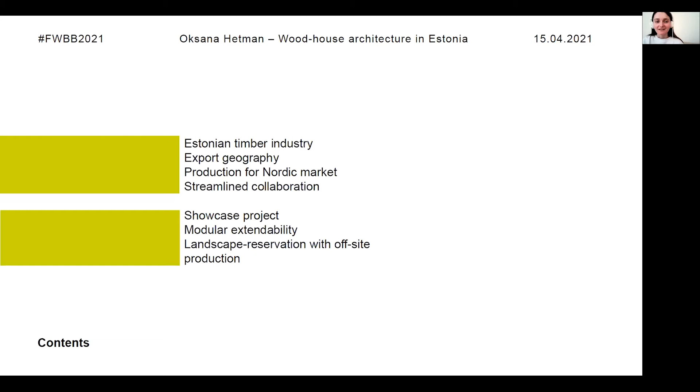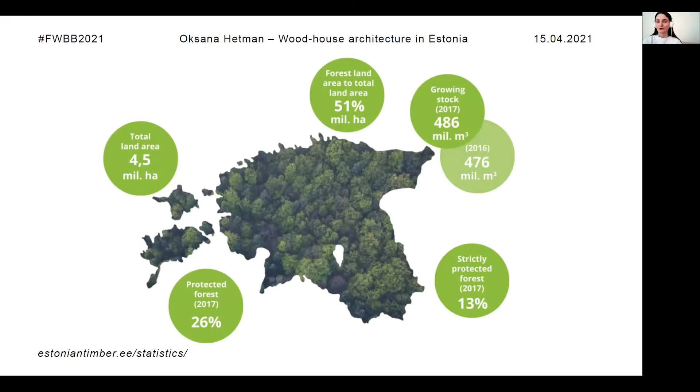Well, Estonia is a land of woods and forests, as it's similar for all the Baltic countries, I guess. But here are some numbers about the official forest land territories and types of forests, and naturally, with all these natural resources, timber product industries are developing and are really popular and successful in recent years. Now, from all the possible products which are made from timber, wooden buildings, as we can see from statistics, are taking the first place in exports.

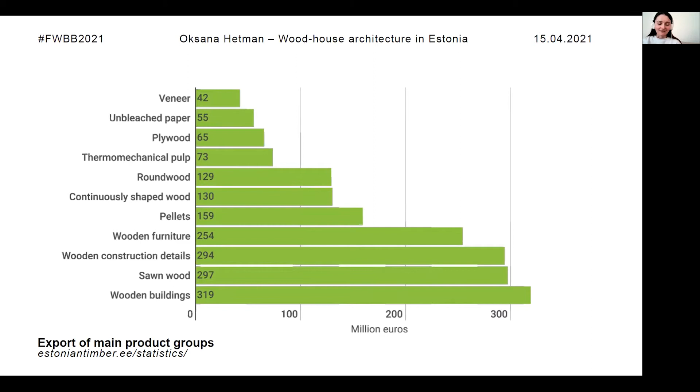And obviously it's because of the location and the convenient transport paths, because as with any other products, but especially with wooden houses, it's important to be able to transport bigger shipments to a destination country. So as the main percentage of the products go to Sweden, Finland, and Norway, I'm working in an architectural company, and we as architects are focusing on those markets too, because since most of our Estonian wooden architecture goes for export, we have to be oriented on outer markets too.

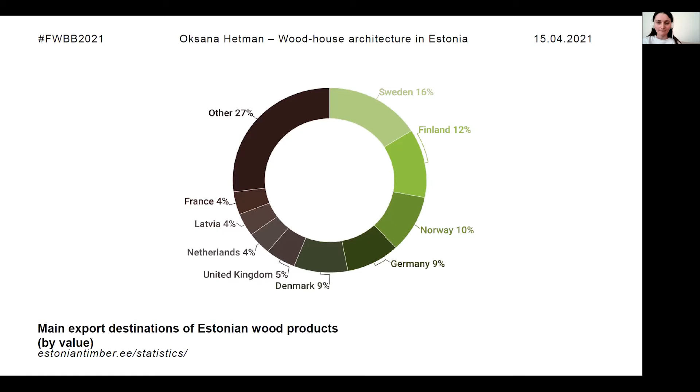Then why Scandinavia, or what are the Scandinavian markets looking for in our wooden buildings or products? First of all, it's quality certified materials, and that would be valid for most of Europe, but then a controlled production process, because obviously these production facilities and companies are available outside of Europe and in more eastern countries, but these Baltic countries can show a really controlled production process, and it's really possible to visit all the factories, and there is high-tech equipment available at the production sites.

The next one would be the already mentioned transportation routes, because direct shipments are possible by ferries, and it's really convenient, which was also used for our project, which I'll be showcasing later. Then one more important thing is the skilled specialists and affordable rates. So why our architectural company is very competitive to the local Scandinavian companies is we have a really big talent pool, and Estonia offers really favorable economic conditions in terms of taxes and general laws for managing companies from Estonia. Also, all the digitalization saves money and time.

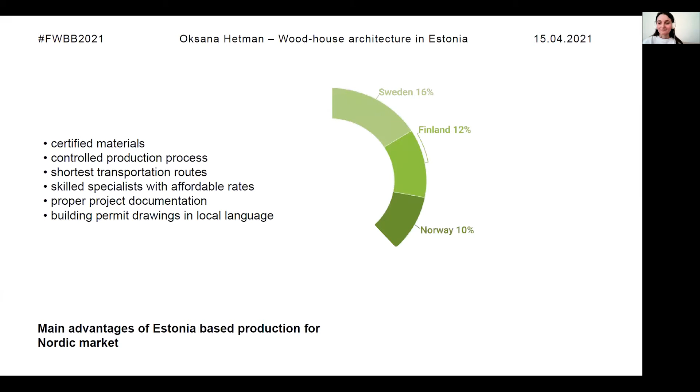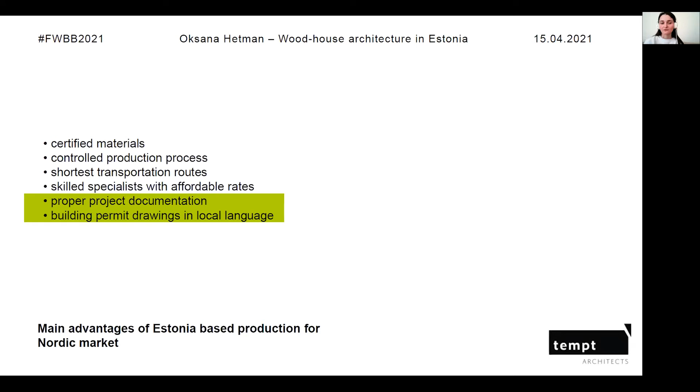Now, even though we're based in Estonia, we are offering proper project documentation for these countries to which we are shipping our architecture and buildings. For that, we have in-house consultants, and we are setting up all the building permit drawings in the local languages. And all of this together creates a perfect pack of business offerings for the developers or companies in the Scandinavian markets. As an architectural company, we are mostly focusing on architectural design, obviously, but also proper project documentation and building permit drawings in local language.

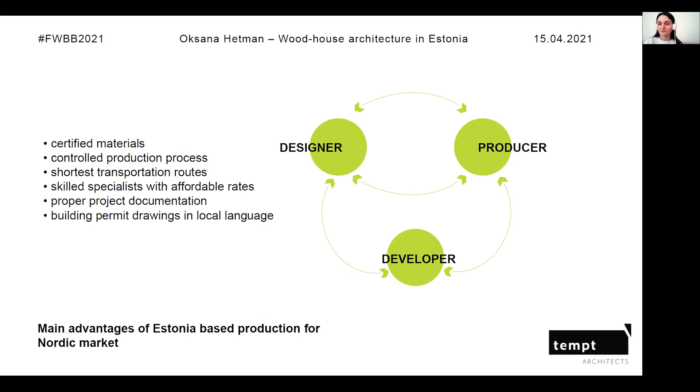Now, how our collaboration usually works. In our company, we believe that it's important to have really nice established connections between the designer and producer, at least. Then the developer or client comes later to these established work processes and can just benefit from pretty much streamlined processes. Between designer and producer, we share drawings and BIM files, but also, as we are usually collaborating with companies we've already had a successful project with, we already have most of their details and technical restrictions. We basically have a perfect starting pack to start practicing our architectural expression.

And when this information is nicely shared, we're saving time on unnecessary changes or technical difficulties which would have to be solved later. Then the developer or client in the end receives a clean pack of documentation and drawings, and doesn't have to be in the middle of this process of adjusting architecture towards realistic production processes.

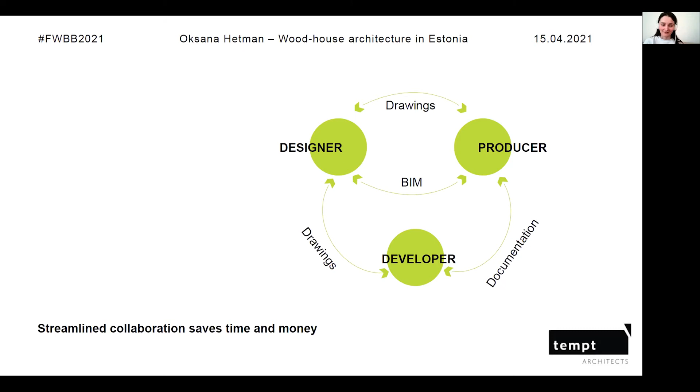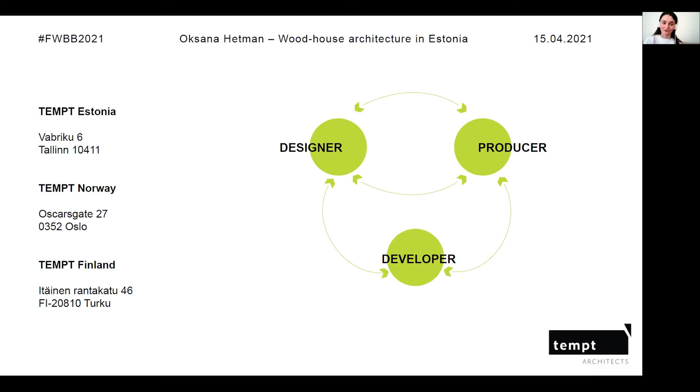Now, most of our production partners are located in Estonia, but most of our clients are actually from Norway and Finland and a little bit Sweden, and this really defined the geography of our architecture office. TEMPT was one of the first, or I think it's still the only architectural design company that is a member of the Estonian Wood House Association, which gave us a bit of an advantage in terms of meeting all the representatives and making sure we find the best production partners for our future projects and future clients.

Now with all that, I want to move on to our real project, which is really quite fresh. It was designed in 2020 during all this lockdown and the home office. So it was a perfect chance for us to really see how smooth our process is, or how efficient we can be working with international partners, and then working with cross-border specialists in different areas.

So my showcase project is a timber prefab residential complex. It was designed and produced in Estonia, and it was designed for Norway. But since more than 90% of Estonian wood houses go to export, I am kind of proud to be presenting the Estonian wooden architecture, even though it was built in Norway. In this case, we collaborated with Timbeco wood houses, and our local Norwegian developer and client was Bolig for Folket.

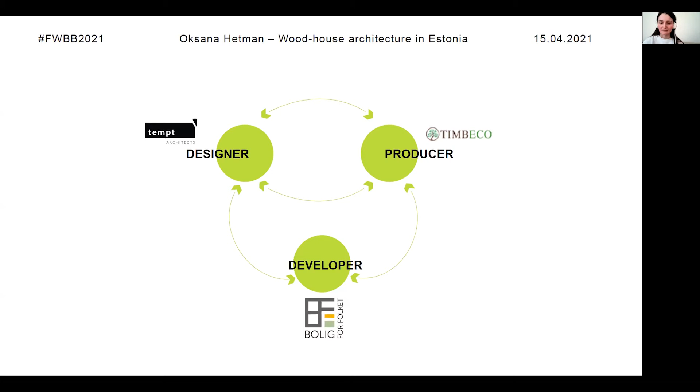We had a chance to work with this breathtaking site. That's on Lofoten Islands, and it's an amazing place. We went there for a site trip in August for a short while, and we were amazed to see how tight the architecture and the landscapes and the nature are all located there. As you can see from the landscape, there's not too much space for industrial trucks and for a building process to move around.

So from the very start of the project we decided that it's going to be off-site modules, and it was really meant to minimize on-site works, also to minimize the storage of the materials or all the building equipment on site, because we really didn't have space for it. Here is our sketch plan or a visual of the site. We have a mountain on the top from the northern side, a really thin plot right next to the road. And from both sides are already other residential buildings.

According to the building permission or the site plot permissions, we had the opportunity to build the 3 units, we only had 2 floors. And then we had the open carports here on the northern side of the plot. Because of the minimal distance from the road and from the sides, we had only small balconies from the southern side, and a really minimal open balcony, which is basically access to the upper floor, which also serves as the roof for the ground floor apartments. And on the side of it, we planned the bicycle parking and storage, also partly covered.

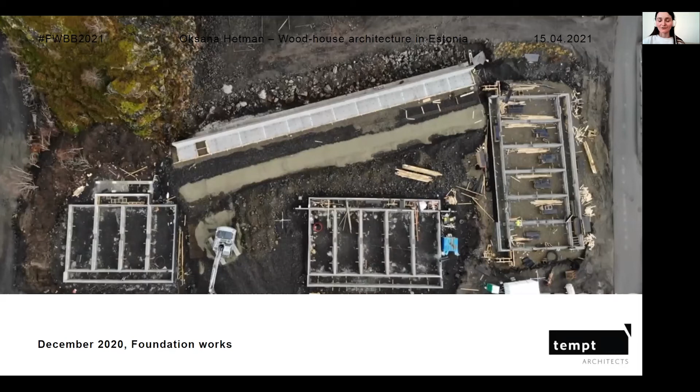As we can see from this visual, the roads are not too wide there. So the developer had to get the permission to block basically the whole piece of road between the port and the building site, and the modules were transported overnight, so as not to interrupt the traffic too much. But yeah, it was really tight. And the assembling had to be done in a few weeks because we couldn't store them too long on the nearby sites.

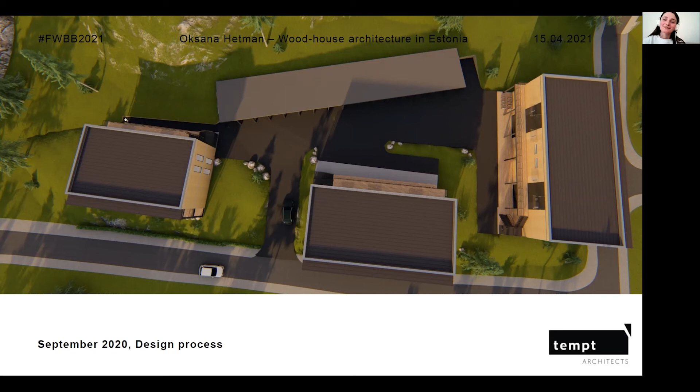Now let's move to the modules. As I said, when collaborating with a particular producer, we have already preset restrictions and some joints and composites for that producer. In this case, it was decided from the beginning of the process that it's modular. So we had the maximum transporting lengths of these blocks. All the balconies and the access corridor were planned as separate parts, built and transported separately. We decided to have only 2 types of apartments.

A one-module studio apartment with this internal window, I call it internal, but actually it does go to the outside, because the access corridor is not covered. So this window does get light, but really limited light because it's the northern side. Also, we had to lift it up to the upper part of the wall to give some privacy, as it's a bedroom, and minimize passing by this window. That's why these modules are usually in the middle of this passage corridor.

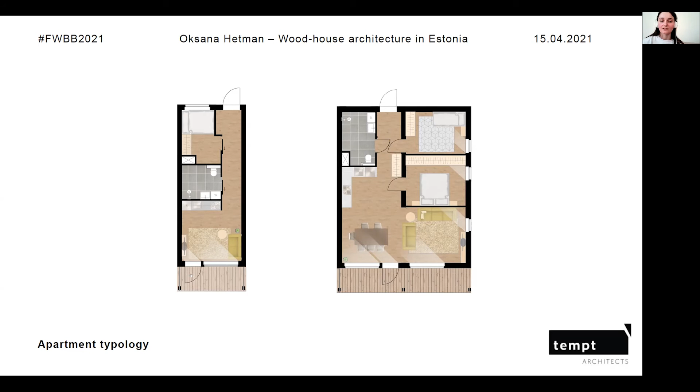Maybe for local people it's something really normal, but for us visiting that site and landscape, we were really amazed with the everyday beauty of the nature there. So it was really important to have really big windows and access to balconies even in the smaller apartments.

Now, since on the plot we were allowed to have 3 living units, and we had only 2 types of apartments, we were making combinations of those apartments for different sizes of apartment buildings to be able to fit them on site.

The first, smallest building basically consisted of 2 flats, each having 2 bedrooms, but it is possible to close up the living room here. We gave this suggestion to the developer, so while selling the apartments, he was offering the future owners to decide if they need this enclosed room or want this open space.

Then again, the maximum length of this open span, because this is one module, it has to be a really rigid structure. So this maximum length was predefined by the production process. But of course, from our side we were pushing for a longer span.

That's again the beauty of working directly with the production party, because in some details we understand that it doesn't influence the quality of living or indoor space too much, but in some cases a small change would be really beneficial for people living there later, or for selling points, or just nicer planning. In these cases we can directly explain it to the construction engineers at the factory, and they will maybe make alterations for our plans.

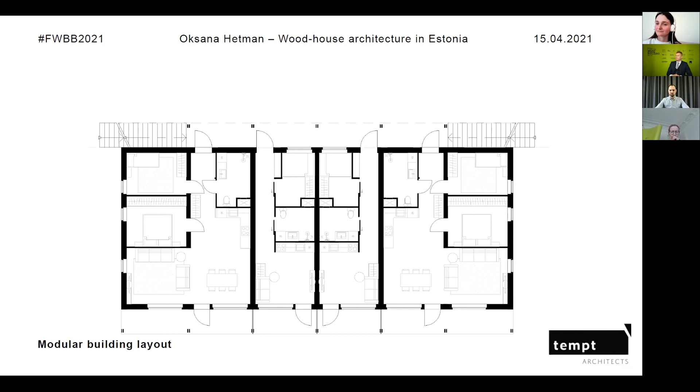This is considered affordable housing for that area, and we made it even more affordable by shortening the building time. The feedback from all the new apartment owners was really good, that it's really useful, functional planning. It sold out really quickly, so we are planning to build more similar apartment houses.

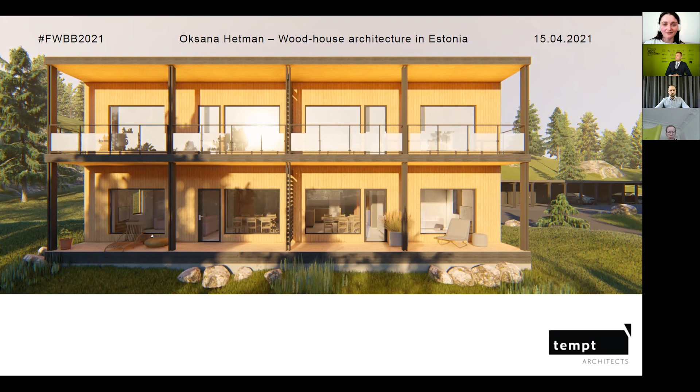Now, this was the esquisse sketch phase of the facade design. We had to have a little step from the floor for construction purposes, but it also creates a step inside which can be used as a bench, so we were not too sad about that. On the ground floor, because the terrace is quite close to ground level, we didn't add any railings, so they can really go out into their own garden. And here are the 3 buildings on our site and the carports behind.

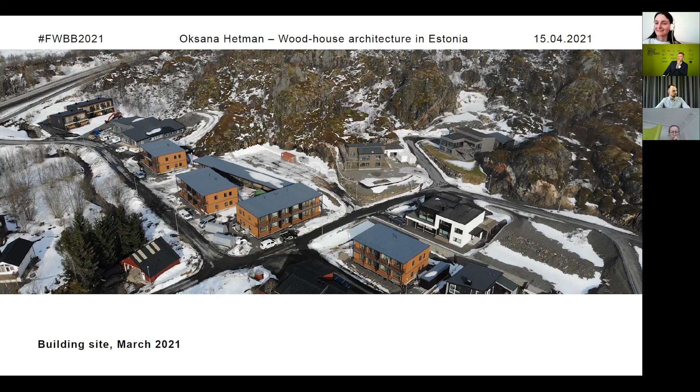Regarding the assembly process, we got building permission in the autumn. During the autumn, all the modules were produced, fully finished inside and mostly outside in a factory. Then the modules were transported on site; transportation started in February. The idea was that after the long night in Norway, when the sun goes up in March, our buildings will be up already, so the local citizens will see it in all its glory in the sunlight.

That was it about my project.